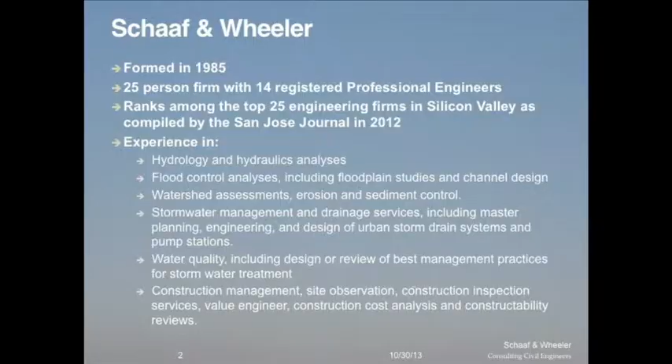So anyway, we were started by Jim Schaaf and Kirk Wheeler in 1985. That's just right when I was getting out of college. I joined the firm in 1993. I'm actually the president of the firm. We have 25 people. Caitlin's one of our most capable engineers, and like I said, she'll be showing you the results of the study we've done.

And just so you know, we have 25 people. 14 of us are actually registered professional engineers in California, and some of us in other states, and that, believe it or not, ranks us among the top 25 engineering firms in Silicon Valley, and they rate it by how many registered engineers you have. So there you go.

It might also be useful, before we delve into the master plan here at Los Trancos, to look at this roster of some previous master plans we've done. I thought it might be useful to just talk about why you would do master planning generically, even before we get into the specifics of what you have here.

So as David said, a master plan is just that. It's a master plan. You start off at a really high level looking at things, and you start zeroing in before you actually do the really detailed design work and put together construction plans. You're doing this for a number of reasons. You want to make sure everything is a part of an integrated whole.

In other words, there's a tendency sometimes to just start solving a problem here, taking a little bit of a shotgun approach, and then realizing, well, I'm going to get rid of my drainage issue over here, I'm going to route the water over here, you put it somewhere else without necessarily looking at the implications of putting it there. We don't want to do that. That's why you do a master plan.

And then the process itself. Those of you who remember when we were here previously, we showed you what's called the Geographic Information System. This is cataloging all the facilities, the drainage areas, characteristics, some of which Caitlin is going to go through, soil types, rainfall, all those things. It's just a way of cataloging everything so you have access to it.

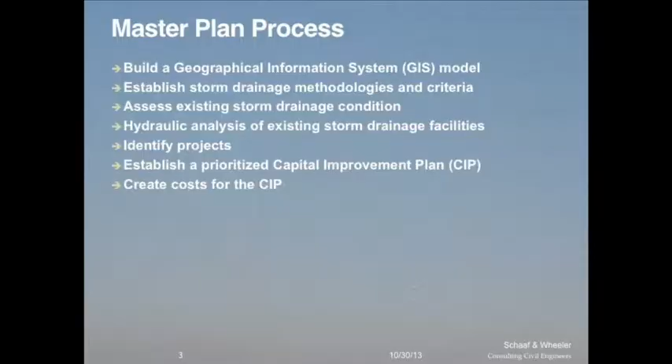Once we do that, we establish storm drain methodologies and criteria. That just has to do with what level of risk we are willing to live with. Here, we'll talk a little bit about what a 100-year flood means. What are we willing to live with? And on a master plan level, that means you're doing things consistently everywhere. You don't have one set of criteria over here and another set of criteria over here.

It kind of keeps it, I don't use the term fair and balanced, but fair and balanced, if you will. We're not going to get political.

Caitlin in particular spent a lot of time, with the help of members of the board and other people, assessing the existing storm drain condition out there. And then we analyze that to see how we can move that water safely downhill, which is what water wants to do unless you spend money to pump it uphill or somewhere else, so that we can avoid the landslides and flooding on people's property. Once we figure out how everything's working on that integrated scale, we identify projects to meet that level of standards so that we're providing the flood protection we want.

With that, we put together what's known as a capital improvement plan. Those are projects needed to rectify the problems and meet that standard of level of service for drainage. Those priorities are established by the risk involved: what's the relative risk of certain issues, what does it take to solve it. Things that are more risky you want to put as a higher priority to fix, and some things just aren't as dangerous, aren't as risky, so they have a lower priority.

So let's get into the specifics here. So the district is very unique, and we start with the hydrology. So talking about rainfall and the properties of the district. So starting from the source. So the climate is different here than the rest of the Bay. You have a 32-inch mean annual precipitation in this area, which is about threefold what you'll see down by the Bay. They have about 12-inch, depending on where you're at. So we're getting a lot more rainfall up here for starters.

Then when we talk about when it hits the ground and gets into the soils, so this is the map of the district. The orange line is the ridge line through the middle. Then you have Los Trancos Creek here, Corte Madera Creek here, both going out to San Francisquito Creek, which goes out to the bay. So you have all your water flowing from the ridgeline down to the creeks and then out north to the bay. So we have very, very steep slopes, as you all know, meaning that any rainfall falling is going to be traveling through the district at a much more rapid pace than anywhere else.

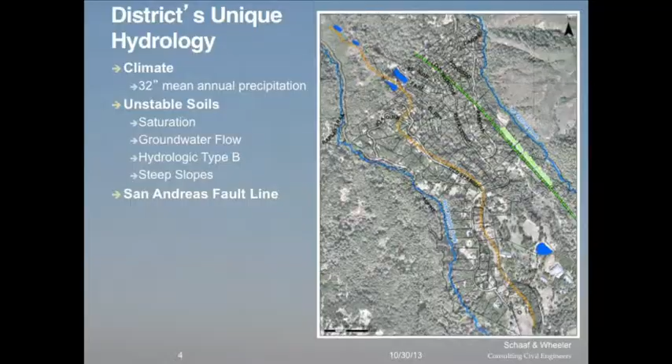You also have what's known as hydrologic type B soils. B soils are fairly free draining, meaning you're going to have a lot of groundwater flow. So you're going to have surface flow, which you all can see, and then you're going to have a lot of water moving through the first foot or two of the soil itself, which with steep slopes, this type of soil, a high amount of rainfall, and you're going to develop unstable slopes. So then you're going to see landslides, etc. So that's the basis for what kind of problems you're dealing with, both on the surface and under.

And then just to add more, you also have this approximate location of the San Andreas Fault, running right through the middle of the district, which, if that were to ever move with your unstable slopes, is going to cause even more problems. So that's where we're at for the basics.

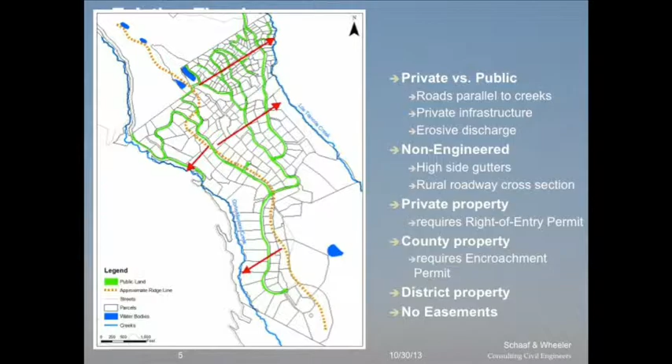Now, talking about your flood protection facilities that you have in place. In general, very ad hoc construction. So you have in green, these are the roadways. So we're talking about public property, county right-of-way. Runs again the ridge line. Red is basically water movement downhill towards the creeks. So you're going to have a mixture of private and public infrastructure. The only way to get from the ridge line down to the water is passing through both private and public property in almost every location.

So you'll notice that the design of the public streets is generally parallel to the creeks and perpendicular to the flow. So in most locations, you have flow coming down through private properties, crosses a small section of public right-of-way, and back down through private properties. Of course, you'll have some flow along the roads itself, but most of the flow is flowing perpendicular to the roadways, crossing through both jurisdictions, if you will.

The drainage infrastructure was never designed cohesively with a master plan. It was very much someone develops their property, they find they have a lot of uncontrolled discharge, they channel it, they pipe it, and they discharge it on their neighbor. And their neighbor finds now they have a problem. So they channel it, pipe it, discharge it down to their neighbor. So it's this step design system with very few pipes being shared between multiple properties, except some people have got together, figured out they could solve the problem together. So that's one kind of disadvantage, is that there isn't one system which delivers all the water from the top of the drainage basin to the bottom.

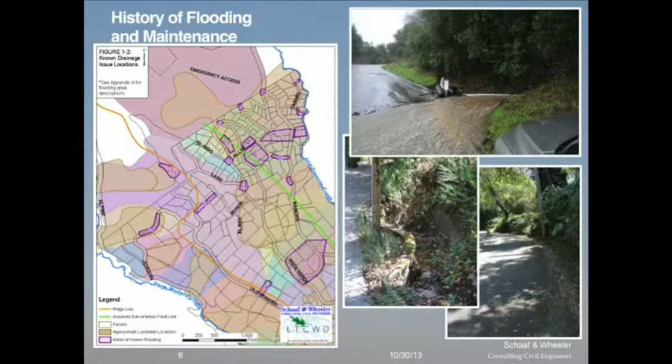So even if you have a great system, full size, et cetera, if it's not maintained, it's gonna be clogged and it's probably gonna fail. And I think that's one of the biggest issues up here, is the maintenance and the clogging.

This section... Question? Yes. Are you open to input on more of those areas that ought to be hatched than what's shown on that map? Certainly. And what would it take? Would there need to be documentation? I don't know how the district was accepting this type of information, I know you've been emailed, et cetera. I don't know how you want to receive comments for incorporation in the document.

Well, I think to send it in to Steve Morrow, the program coordinator, and then he can forward on to you. Yeah. If you could email, I believe the email address is available for Steve Morrow. Yes. You could email that and I'll be sure to look at it and incorporate it. Okay. What constitutes the criteria for being hatched?

It's fairly loose. I mean, do you see flooding there? And you know maybe why. You can give a recommendation of why you think there's a problem, and I'll go look at it.

Tell you from an engineering standpoint what I'd say, but I've been roaming the neighborhood, and in one particular case, a property owner commented about some damage to their property from water coming down the road and jumping the curb right at their house. And so it caused property damage. It would seem like it ought to be. Oh, absolutely. Property damage definitely makes the cut.

This last picture, I don't know if it's the best to show, but another feature in a good amount, I think more in the northern portion of the district than in the southern. But you see where there's no curb, and then the valley gutter is on the uphill side of the road.

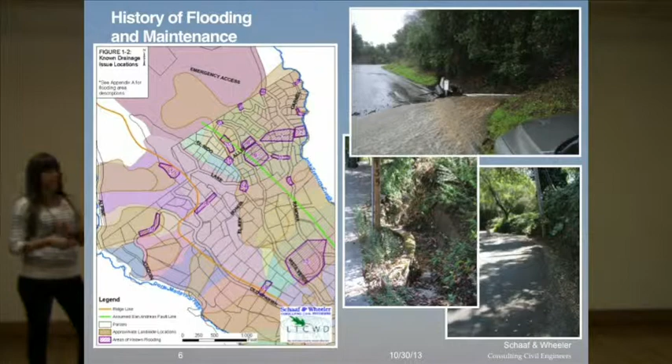So the valley gutter collects water that's coming off the hillside, but then the road itself slopes away from the valley gutter. So any water coming down the road is not entering the gutter system. It flows down the hillside and onto people's properties. So that's another flooding issue that can cause damage.

Let's see. Oh, the other thing I wanted to mention about this maintenance is that as far as on the right-of-way, the county has the responsibility of maintaining their system. And it's included as the final appendices in the report, but the county Public Works Department has a watershed maintenance plan that's in place.

You can find it on their website, and for every one of their unincorporated county jurisdictions, they've mapped all the roadways that they are scheduled to maintain and their schedule of maintenance. This area is scheduled to be maintained the first and third Thursday of every month. And I don't live out here, but I imagine they're not out here every other week.

So that's one of the things that, as a conclusion, might help this whole system: getting them to actually do what they say they are going to do out here, and that is to clean it more often. The more times they remove trees, leaves, and other debris from the system, the more prepared your system is for the next storm.

A quick regulatory section. This is all in chapter 2 of the report. There's a few different governing bodies besides just the county that are going to have jurisdiction over anything you do to the storm drain system up here. One being CEQA. That process for any new construction has a variety of impacts on your construction schedule and costs, et cetera.

The first category of CEQA compliance would be getting a categorical exemption, which is usually for projects that are in an existing roadway or upsizing an existing pipe. CEQA is all about how you're impacting the environment. So maintaining or upsizing or fixing an existing system, especially if it's in a paved right-of-way, you're not going to affect any animal habitat, et cetera.

You can pretty easily and pretty cheaply, if you get a categorical exemption, do your work. Some of our work would require what's known as an initial study. So you need someone to come out to your project and say, how is this project going to affect the environment? And then that would result in either a negative declaration, meaning this project won't impact the environment, you're good to go, or a mitigated negative declaration, which says you may have some impacts, but if you plant these trees or only do construction this season so you don't affect this frog, et cetera, your project's also going to be fine and you can go ahead and proceed.

One step further than that is having to do an actual EIR, which is a very costly and very time-consuming document. That's when you have significant impacts to the environment. And at that point, if we end up with a project like that, then you start thinking of alternatives to that project, because it's likely a budget killer. But most of the projects that I've identified in the capital improvement plan fall under one of the ones I've listed here. So they should all be reasonably doable.

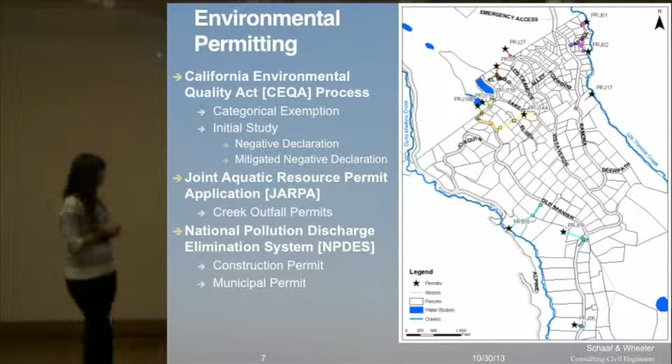The other item is if you're doing a new creek outfall to either Los Trancos or Corte Madera Creek, they're waters of the state, recognized by the state. So if it's a new outfall, not an existing one, there's plenty of existing here, you'd have to fill out a JARPA permit, the Joint Aquatic Resource Permit Application. It tells you basically which permits you need for the Regional Water Quality Control Board, Army Corps of Engineers, Fish and Wildlife. It basically gathers them all in one permit. They say what they need from you, and then you comply with their permits that way. So it adds some money and some schedule to your project, but certainly doesn't stop it.

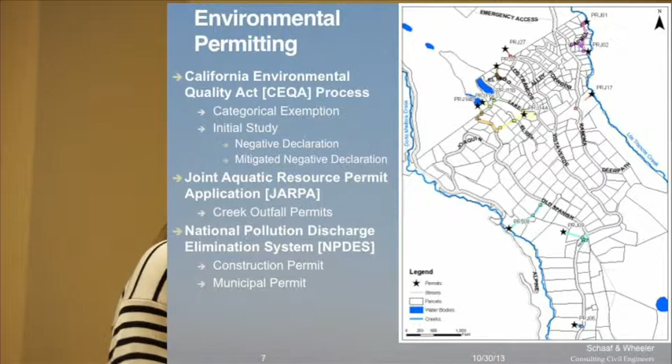And then the NPDES is state or regional permits. These projects won't impact them in a real significant way. I think the most significant thing for these stormwater projects is complying with a construction permit, which is all about trying to reduce sediment loading into the water body due to construction. It's a lot about good housekeeping practices on the construction site, installing storm drain inlet protection. You probably see some of the construction sites around here doing it, the straw bales, et cetera. So that's the permitting to think about.

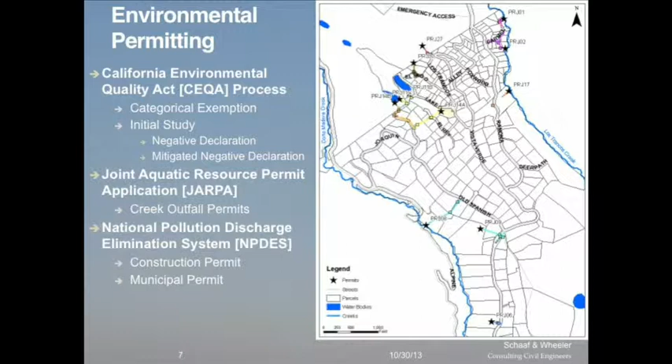Quick question, the stars on there? Yeah. Those indicate potential projects that we've identified where if you did these projects, you'd probably need more significant permitting than just a categorical exemption. Right. The projects themselves are really detailed in the report, and we'll get a little bit more into what the projects are. Sorry, I didn't tell you what my figure was. I think there's like 9 projects where, if you were to do them, you'd need a little bit more permitting. So we've identified those in the report, both in the cost estimating and the description of the projects, to flag that. Because sometimes it'll take another 6 to 8 months or even a year for permitting. So if you want to do your project now, you've got to think about it beforehand.

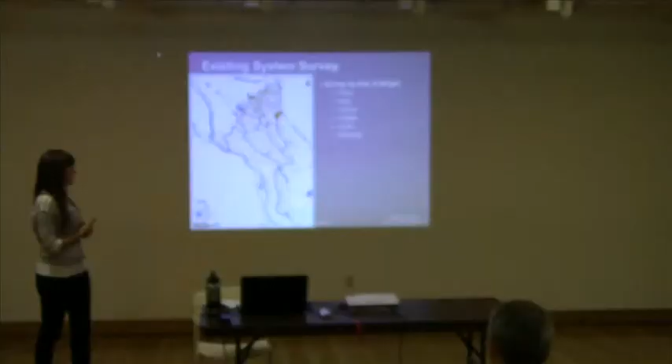I think this was mentioned, and you probably saw them out here, but Karen Wright helped us with surveying of the existing storm drain system. And the survey was really key to doing this entire report, because you certainly can't evaluate what has capacity and how to fix your storm drain system if you don't know where it is. So you'll notice all the red; these are all the survey points. All of their surveys go straight into the GIS. They couple together lovely. So all the things that they surveyed, pipes and gutters, outfalls, curbs, roadways, they really helped us with that so that we could identify where the system is and then move on to developing a capacity evaluation. So going through the different system elements that we analyzed.

So pipes. I guess I should do a blanket statement. We did not analyze the capacity of any system that serves one property and not another. So if you have a pipe that goes from your roof and then discharges at the downside of your hill and it doesn't go into another system, we didn't analyze it, because we would have to walk over every single person's property. It's just a little time consuming. But in addition to that, we really wanted to focus on systems that serve more than one property.

Because if your pipe to your roof leader drains isn't working, then it's kind of a single property issue that should be dealt with there. So the pipes that we were analyzing were pipes that were both in the right-of-way and larger pipes that served more than one property throughout the district. So these were often, if they were older pipes, corrugated steel.

A lot of issues with corrugated steel pipes: they can corrode and rot the bottom out. Therefore, once water flows into the system, it's basically discharged back into the ground again, almost like an infiltration bed. So that's a problem of maintenance of existing storm drain. Another issue you can see in this one here, there's a lot of driveway gutter culverts, and they get driven over and crushed, whether in the middle of the pipe or the ends, which severely decreases the capacity of the pipe.

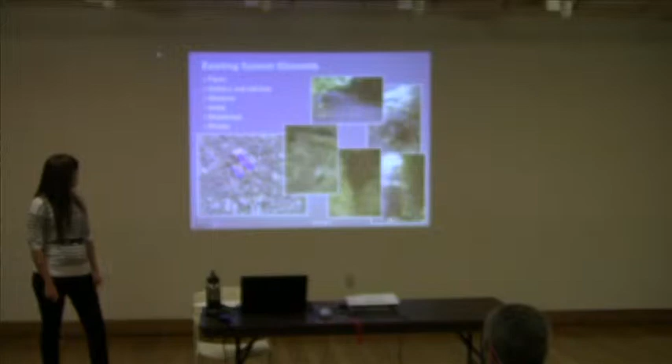As far as inlets, I don't know if this one's a great one you can see, but this happens frequently throughout the district. We have water coming one direction, and the inlet to the pipe is at a 90-degree angle. And that's difficult. Water does not like to change directions. So you end up having water flowing up the other side of the hill or pouring over the side of the road. It's difficult for water to just turn like that, and you end up getting discharges from that system at that point.

The roadways themselves, I think I've beat this one to death, but they're sloped in such a way that ends up sending water down people's driveways or across their properties as opposed to into a storm drainage system.

As far as detention ponds, this figure is a little hard to see, but this is Water District Lake on Lake Road here, and then this is the Frog Pond, and they're on the two sides of the main ridge line that goes through the district. This red star is the highest point. This is in Blue Oaks open space. This is the highest point in the district. So you'll notice that these ponds are actually very near the top of district lands.

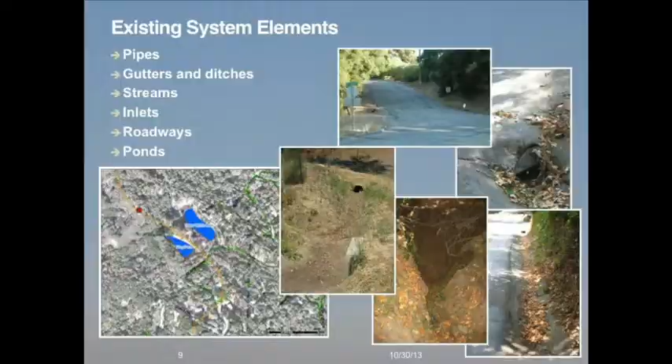So therefore, they're intercepting water from the top, but don't really provide much storage for the rest of the district. So they're not intercepting water and helping, and by helping, I mean providing detention storage capabilities to reduce the peak flow that the infrastructure sees, because they're so high within the district. And there's only two of them. There could always be more. So I'll talk about that a little bit later as well.

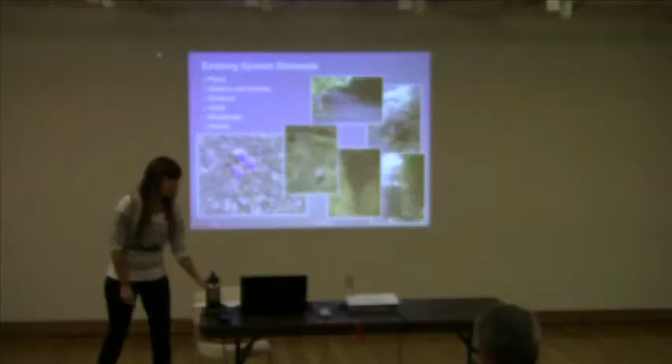So before I talk about the capacity and how we evaluated that, the last time we were here, I feel like I discussed at length the way we did hydrology and basin delineations, etc. There is a map in the back that shows all of the drainage basins. I don't feel like we needed to go over that in detail again.

But I will say, so we delineated drainage basins, and the point to talk about this is that what makes this area unique is drainage basins are generally delineated by their outfall. So all of the land that flows to one outfall point would be one basin. In the district, there's 26 basins, meaning that they all have separate, very distinct places that they are discharging to the creek.

So what that means for projects is something you do in drainage basin A, the pink one, isn't going to affect basin B at all, because they're hydraulically separated. So that's unique for this area. The more low-lying areas might have 4 basins in the whole city, but we've got 26 in this one little area. So you have to analyze them each individually, and one generally doesn't affect the other unless you change your flow patterns.

Okay. So the existing system capacity, we came up with 3 different conditions: the worst condition, medium, and everything's okay. And this is based not on what we see out there, not on maintenance issues, but purely on hydraulic calculations. So condition 1 is the worst case. It means that during a 10-year storm event, this system will flood. It can't control that. So those are shown in the master plan as being red.

So we looked at the gutters, the streets capacity themselves, and the pipes, and then the streams that go from the actual creek up to the drainage system, those incised channels down by the creek. So we analyzed all of those and came up with either condition 1, worst case, they can't handle it. Condition 2, they can handle the 10-year event, but they can't handle a 100-year event, the major storm. And then condition 3, which says, based on hydraulics, this system can handle the storm event.

Okay. Then, after we did that for all the systems that we had analyzed, as a side note, it's clearly in the report, but all of the Blue Oak system, the newer system in the open space to the north of Los Campos Woods, that entire system can handle a 100-year storm and then some. It's significantly oversized. It's a good thing up here. So I was pleasantly surprised. Being that it's a new system and designed by BKF engineers, that's good for them.

For reference, I just chose this as one example of how the projects are shown in the master plan. We have Frog Pond here, and this is Joaquin Road coming down from the ridge to the top, Old Spanish Trail. So when it came to identifying projects and prioritizing them, the goal was to fix, 1, any problem where identified flooding is occurring, and 2, give a project where there is insufficient capacity in the existing system as we've identified it.

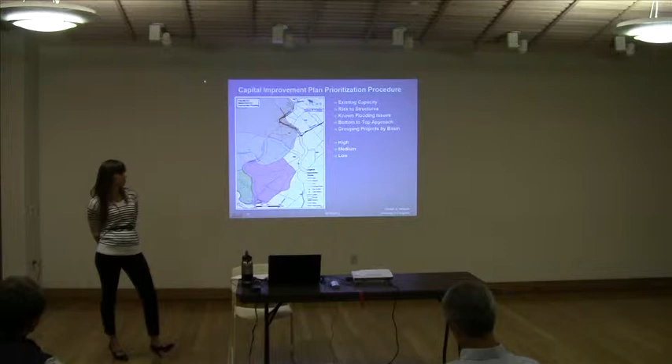So we identified about 30 projects overall, and those can be grouped to be less than 30 in number. Separately is the wrong word to use. 30 individual projects that are based on whether they have existing capacity or not, what level of risk they cause to structures, or risk to road beds. The significant access features were considered at a higher priority level than just risk to erosion in open space where no structure is put into danger. Also put into the prioritization was known flooding issues.

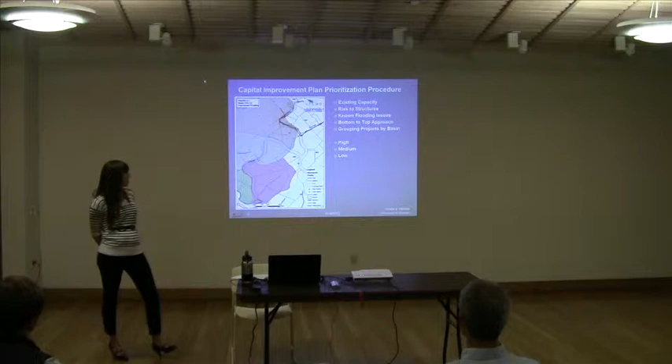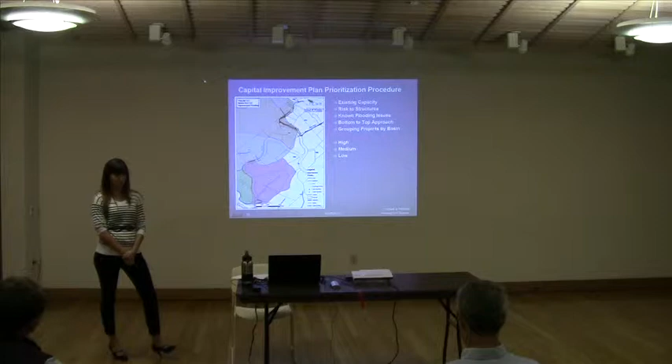This bottom to top approach is, when you are designing any system, you can't fix what's at the top of the watershed first unless you know you have capacity at the bottom of the watershed. So if you fix a problem at the very top and you allow all the flow that used to be flooding everywhere to enter one system and discharge down the hillside, you can overwhelm your systems at the bottom because those perhaps do not have capacity. So you're basically just moving the flooding problem downhill.

So you have to fix the outlet first and work from the bottom up in order to make sure you're not causing flooding on your neighbor. So that was worked into the prioritization process. There can be no high priority project above a low priority project because you have to do the one at the bottom first anyway, or at the same time.

Another thing we looked at was to group projects by basin. Grouping projects saves costs for construction, among other things I'll discuss a little later. So we came up with 3 general priorities: high, medium, and low. It's described in the report, but I'd say it's loosely based on this.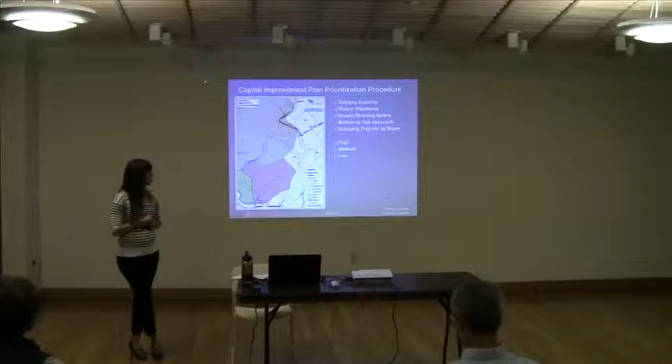High priority would be a project where identified flooding has happened and you have condition level 1 or 2, so that's a medium or high capacity issue, and we know flooding happens there. Or they have a condition level 1, meaning they have a capacity issue of the worst kind. So those were the higher levels. Medium level being that we know there's a flooding problem, but according to our calculations, there's no capacity problem, more of a medium risk problem.

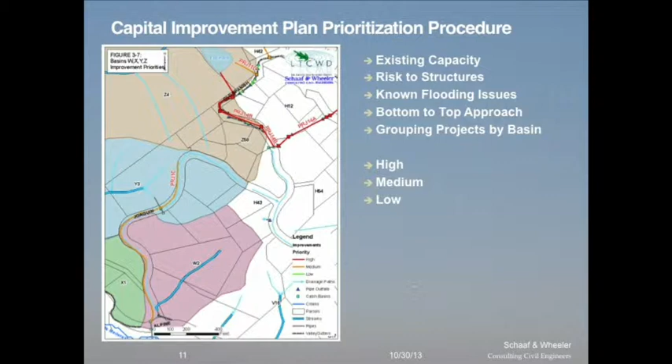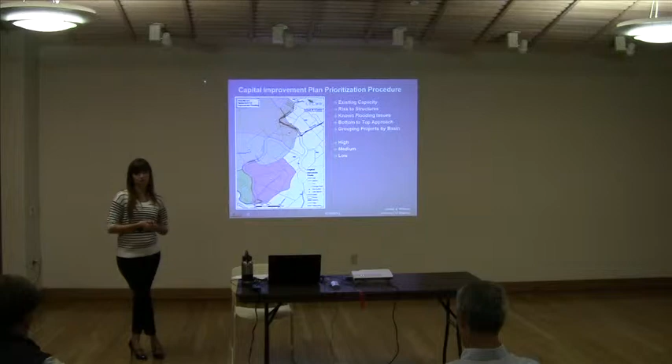And then the lower were projects where we've identified a capacity issue, but upon site walks, et cetera, did not notice any reason why it would flood, or more likely it wouldn't cause any damage if it did flood. So even if the pipe was surcharged and did flood, it wouldn't cause damage to anyone's property. So those are more low priority.

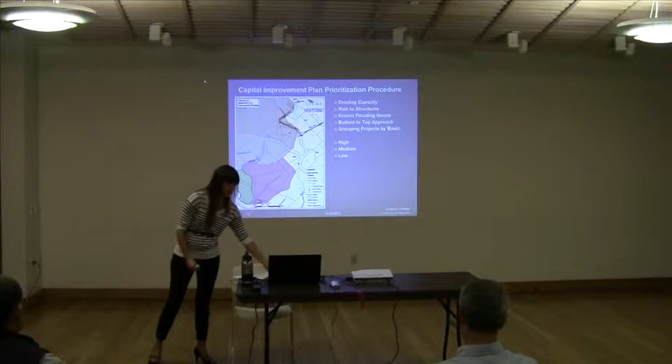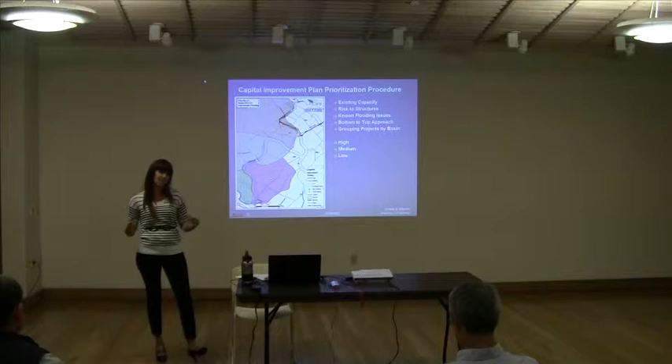So once we've identified all of these potential areas for projects, we did some extensive site walks because they're all so unique. In almost no place was it just, okay, we just have to put a bigger pipe in. There was much more to it. Perhaps the water couldn't get into the system because the inlet was undersized or placed at the wrong location, or water was flowing over the side of the road because there was no curb line. So it was more than just upsizing pipes.

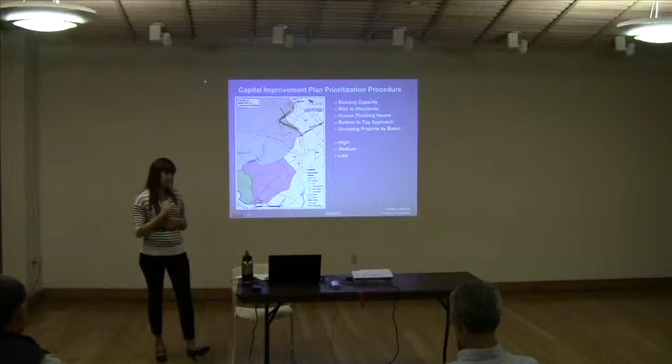So a lot of site walks with the district's help to figure out a unique solution for each problem area. And when developing the capital improvement projects, there were a few other methodology things that came into play for each design. We tried to incorporate them as much as possible. One was to move flow to the right-of-way as much as possible, so it's not going through private property. In a perfect world, it'd all be in the right-of-way, right? So wherever we could get it into the right-of-way and off private property, that's the design we did.

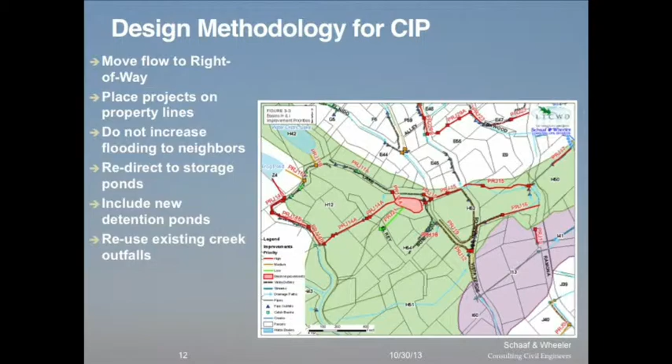Where that wasn't possible, we tried to place these projects on or near property lines as much as possible, to share the burden of having a storm drain system through your yard, and avoid cutting through the middle of someone's yard and making the space unusable. Just get it out of the way as much as possible. One thing to always keep in mind is do no harm. You don't want to create a project that just takes your flooding and makes someone else flood. Not only is it not being a good neighbor, but you open yourself up for a lawsuit, and you don't want that. That's a lot more money than a new project anyway.

Also, redirecting any flow from the top of the drainage basins into ponds as much as possible. The whole purpose of the pond is to retain flow from high storm events, to reduce the peak flow downstream, and potentially create storage. So that was another option we tried to work into each project improvement where we could. Here we have Dog Pond and the Water District Lake. This is Old Spanish Trail, Lake Road, then Vista Verde is here, Los Trancos comes around. This parcel here is Water District land, and this is El Rey. So we also tried to work in Water District property or open space where we could.

We did provide non-pond alternatives, but also an alternative of installing a detention pond where it would be feasible, because that could really help downstream infrastructure by reducing those peak storm flows. So one alternative for this project is infrastructure that goes into a pond here on Water District property. And the other, for this particular instance, would be to redirect the flow downstream of the Broad Pond. So different alternatives are given to create the same result, the result being less flooding downhill. And all of this flow eventually makes it through Ramona Road, where the Spanish Creek is. So anything new to reduce flow there is also good.

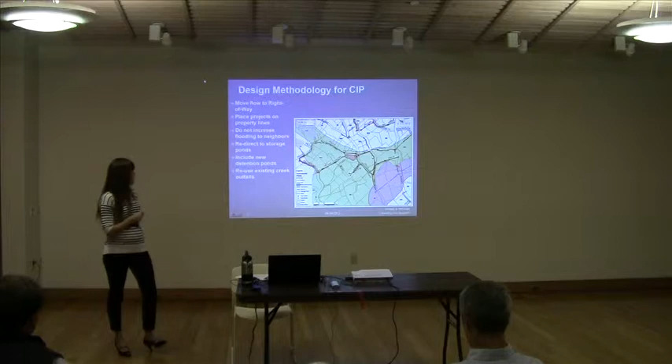Another design aspect, in order to reduce costs and time, is to reuse existing outfalls wherever possible. Creating new outfalls is a big headache when it comes to permitting. In addition, it's hard to just walk down in that creek, in Los Trancos or Corte Madera Creek, let alone construct something down there. So it's going to significantly increase the cost of your project if a contractor has to get heavy machinery down there, both for permitting and just feasibility.

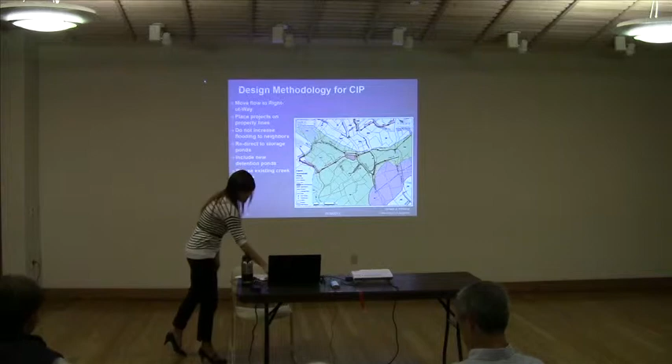All right. So once we really narrowed down what these projects could be, we gave alternatives where we could, and created these 30 projects throughout the district, and we gave a project for every single high, medium priority site that we could. And there's a kind of a cut sheet in the appendices of the report where you could pull out just one project and it shows the project itself in detail, what pipe sizes, etc.

I will note that these aren't construction level drawings, they're concept. They would need to be brought up to a construction level either by an engineer or a design build contractor who has the skills to do that as well. So these are very conceptual. How big does the pipe need to be? Not exactly where is it placed. That can be done on a much higher detail than what we've shown.

We then moved on to cost estimating. So cost estimating, we do this a lot. It's based on projects and bids we've seen in the area for similar projects recently. So we get a lot of these, put them together. We're constantly changing our unit cost numbers to try and follow the trends as the industry goes. So we put costs, and the base, the 50% here, is the actual work. So we're talking about the man time, the labor hours, the equipment, and the pipe, the trenching itself.

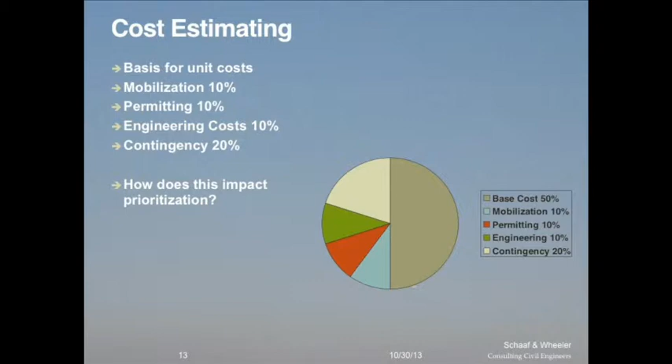And the last is contingency. It's just the extra what if for what might happen over the course of time between now and when you want to design it, for any sort of flexibility. So we did that. Every project's cost estimate is detailed down to the unit cost in the report, so you can see where our numbers came from.

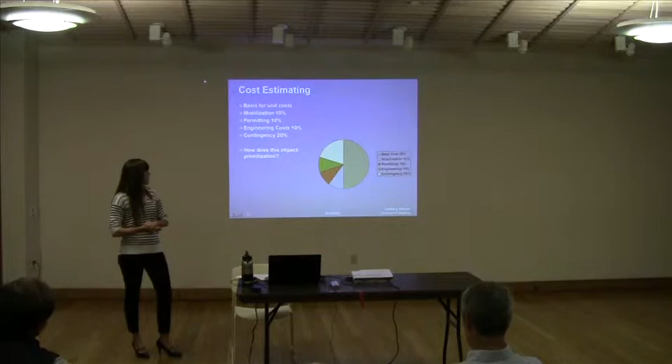And then one of the other items that is separate, it's not part of permitting, is environmental permitting. Any of those 8 stars we saw a while ago, all those ones that I said required more permitting, we added a line item for that. So it is accounted for separately. This permitting is more just erosion control stuff and encroachment permits, and it's really construction permitting versus the environmental, which is usually more money and was delineated separately.

So once we had all these cost estimates and all these projects at low, medium, and high, which is kind of a general priority of how they should be done, we then took these 2 things and created, at the back of chapter 4, a CIP section. It's really theoretical, it can be changed. It says if you were to do all of the medium and high level projects over the next 10 years, this would be our engineer's recommendation of which ones you do each year.

So it is a combination of all this prioritization that we talked about. It's a combination also of cost. You're going to want to take the high level ones that cost the least amount of money; it would make a lot of sense to do them earlier, get them done first. Also into that is grouping them by basin, which can save you mobilization and permitting costs. So grouping projects together that are right next door to each other makes a lot of sense.

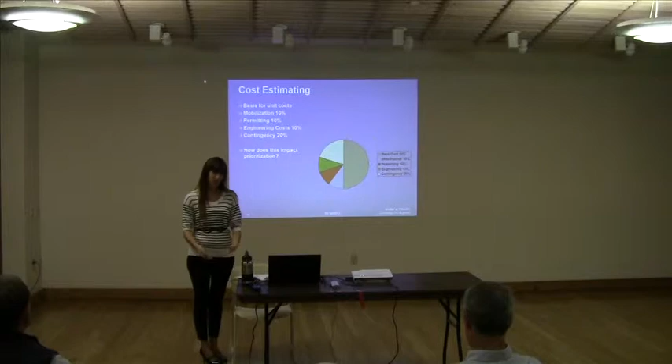Also included in that table, the costs do reflect inflation. So for projects you do later, it shows what the base cost is if you were to do it this year. And then it shows you, well, if you do it 10 years from now, it's clearly going to cost more. So we use an inflation rate that's detailed in the report as well to show that over 10 years, the projects in the future will cost more.

So beyond the actual improvement plans and the actual projects, there's a few other things that are important to a functioning storm drain system that perhaps don't get included in specific projects or could be worked into each of the individual capital improvement projects. One, traffic safety.

The rural aesthetic that I was referring to before, and the idea of having these roadside ditches, well, they end up being paved, which means they look exactly like the road, especially late at night. And you have this slender road, and you have these huge ditches on the side of the road, which in a lot of our projects we recommend increasing the capacity of from just the little tiny thing you have to like 1.5 feet.

You run the risk of driving into it and bottoming out the car, so it would be a really good idea to do white reflective pavement striping on the edge of the drainage ditch. Perhaps where it's really bad, they have these semi-permanent flexible cone things you can run over, but that make it more clear where these ditches are.

So I know it's not as pretty as having a nice roadside, but I believe it actually happened recently that a car drove into one of these, and it caused the car and the drainage system some damage, so it's just a good idea. Along the lines of safety, trash racks. There's a nice makeshift one out of a fence.

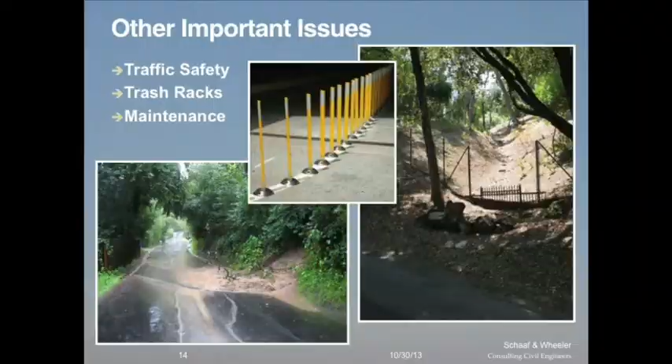Trash racks, besides the maintenance, which I'll talk about in a minute, provide a level of safety. You have a lot of very large inlets to storm drain structures that children or animals could fit in. And now that we have a survey which shows what the invert of those inlets is, they're often 20, 25 feet down, which you can't tell from just looking at it from the outside.

But if you were to go into one of them, you'd immediately fall 20 to 25 feet. And there's nothing preventing anything from doing that at this point. So it would be a very good idea to install them from a safety and risk standpoint.

In addition, there's a ton of makeshift trash racks that people put out there to try and help with the maintenance of the system, try and keep debris out of the pipes. Some of them work, some of them don't work so well. But one thing that's good about an engineered trash rack, one, they're secured in place so that they don't end up going down with the storm.

But in addition, they're designed in such a way, and placed at such an angle, that they allow the water to push trash or debris, whether it be leaves, up the rack, and water to still enter the system. So a designed trash rack should be incorporated in the new project designs of the inlets. They're easy to place while you've got a contractor out there at the same time.

And with the concept of trash racks, you have to maintain them, and more things to maintain are always a pain. But it's a lot easier to rake trash off a trash rack than it is to have to hydrojet your pipes, which is really expensive.

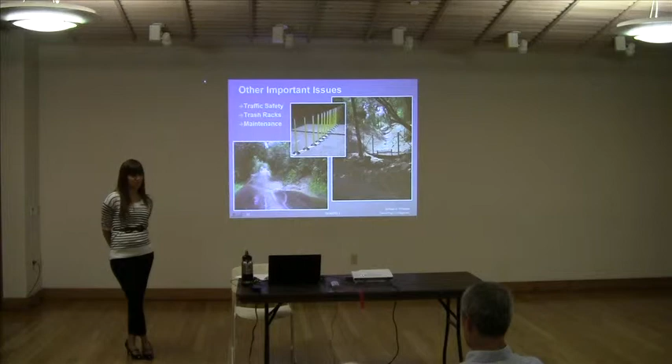People forget about it, so it doesn't work anymore. And I don't mean to make this generalization, maybe some people are maintaining their systems frequently. But because there are so many private systems, they're not on a maintenance schedule, and without maintaining, they're going to be full of leaves and possibly fail in a big storm event. So not having scheduled maintenance on private systems can be a problem.

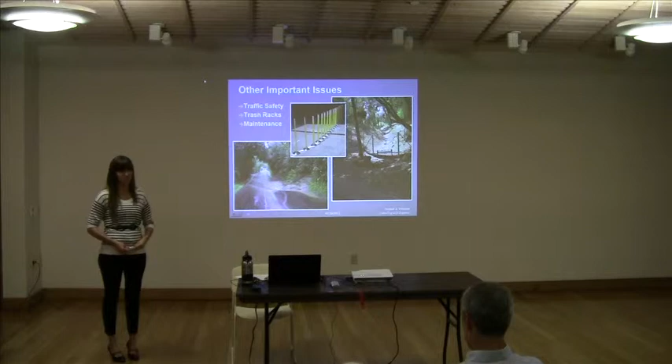So it's just something to make everyone aware of, that no one's going to maintain their systems, it's just on their property. A perfectly good system can fail just because a bunch of leaves get in there and get stuck.

All right, as far as the master plan itself, the document, it's really big. It's going to be a lot to get through. In the beginning, the executive summary is straightforward. It tells you what the plan is, what it's based on, and what the outcome was. The introduction is really the setting, what the district's lands are, the background up here, how much rainfall and just the general setting. Then I have a section on the regulatory requirements. That's all the permitting that I've been through and discussed that really needs to be remembered when we go into construction.

Then the next section, so we're talking about chapter 3 now, is on the existing collection system. It starts off with some exhaustive information, from an engineering perspective, of how we calculated the capacity of the existing system, what equations, and how we identified the different capacities. It goes through what the capacities mean in a more detailed manner. It goes over the assumptions we made. We had to make a few since we don't know everything. And then it goes through on a basin basis; I labeled the basins with letters, A through Z. Conveniently, there were 26. So it identifies all the projects that we've come up with.

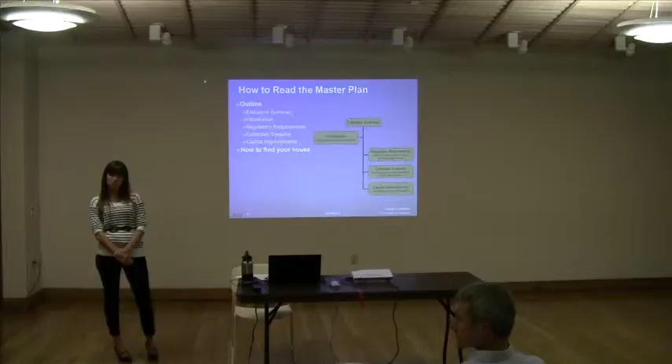Yes? Is there a GIS overlay that could put the house addresses in the final version? I do have that. We did remove it from the figures, and I can't remember why. It would be helpful for people to see who's next to them. The idea is to create something where individuals can find their information. I wrote it in on the neighborhood map by myself, and it was very helpful once I saw it. That's a good solution. But it took 4 hours, and you could do it in a few keystrokes. It'd be very helpful for us to see where we're talking about.

It's a privacy issue, that's what I'm saying. It's public record, my address. The addresses are public. Yeah, the addresses are public. Up to you guys. I don't want to put the person's name on it, just the street address. Yeah, and that's something that we do have in the GIS database, that we just didn't map or publish. But we could; that's a suggestion we'll certainly put in, to make it easier for people to locate.

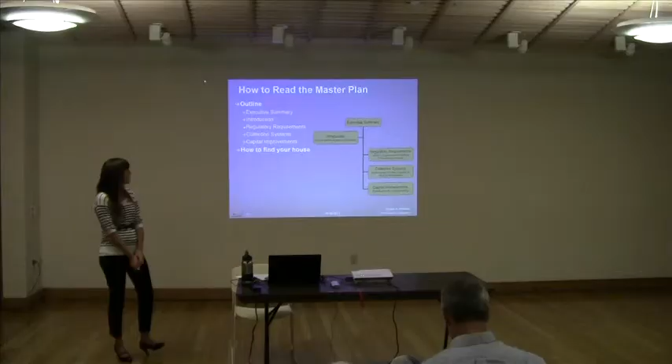So that's what I had to go through, so I'd be very happy to answer any questions that you have. I didn't want to go through each project individually. That would take forever, all 30 of them. They are drawn up on a map in the back, and they are in the report itself. So feel free to look up whatever project you like. Hi, I'd like it if you could possibly take an example of just one and walk us through it.